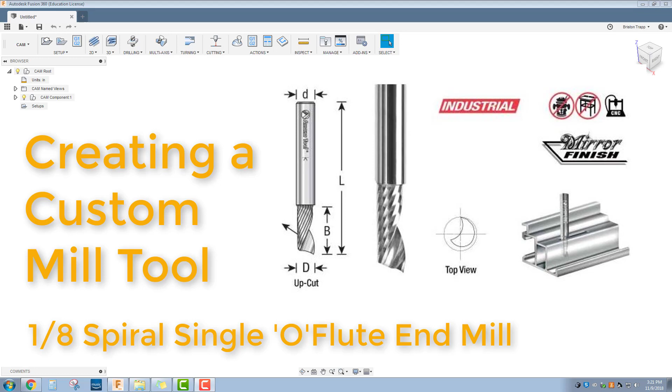Hey everybody, in this tutorial I'm going to show you how to create your own milling tool for the CNC router. We will be using a spiral O flute from toolstoday.com.

It's an Amana tool. This is primarily going to be used for CNC router cutting aluminum sheet metal and plastic. It has an 1/8 inch diameter, a cut height of 1/4 of an inch, shank diameter 1/8 of an inch, overall length of 1.5 inches, and it's a single flute cutting end mill.

$26 a piece, pretty expensive if you're breaking them every now and then.

So in Fusion 360, you need to make sure you're in the CAM workspace, and we're going to go over here on the right to our tool library.

You should have some sections on the side where you have your tools that are stored within your documents that are currently open, and then also cloud tool libraries, local libraries stored on your computer. You're going to stay away from these since you use different laptops. There's also tools from vendors. So if Tools Today or Amana had their own tool library in Fusion, we could select from here, but we have to create from scratch.

There's also these sample tools, but we're just going to start completely from scratch.

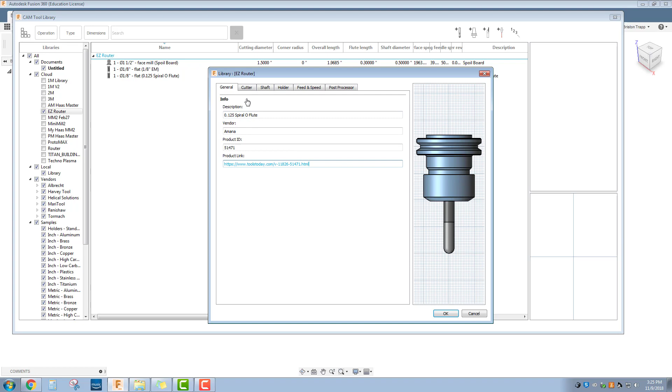On the cutter tab, this is not a ball end mill, it is a flat end mill. It has one flute. It does spin in clockwise spindle rotation, so we'll leave that checked. It's in inches. The material is made out of carbide. It does not have through tool coolant.

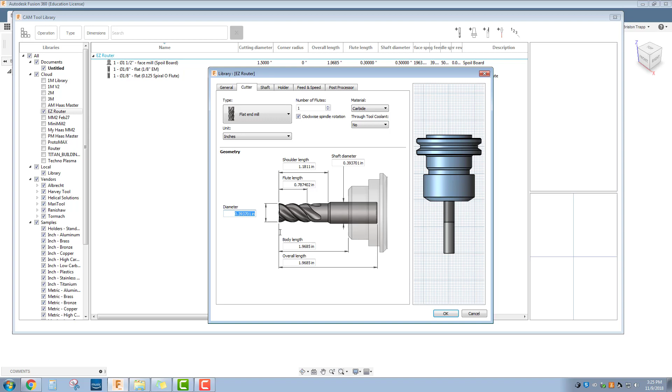The diameter is 0.125, 1/8 of an inch. The flute length is 1/4 of an inch.

The shoulder length typically doesn't matter on this. We're going to leave that at 0.375. We don't even really have a shoulder on this tool. The shaft diameter is 0.125, the same as the cutting diameter. The body length is typically going to be the amount of tool sticking out of the tool holder or collet.

Most likely when we're cutting parts on the CNC router, the EZ Router, or the Patriot, we're not going to have to worry about tool holder collisions because we're cutting fairly simple flat 2D parts. So typically the only value that really matters here is this diameter of 0.125. The second most important one would be the flute length, because we cannot cut anything deeper than the length of our flutes.

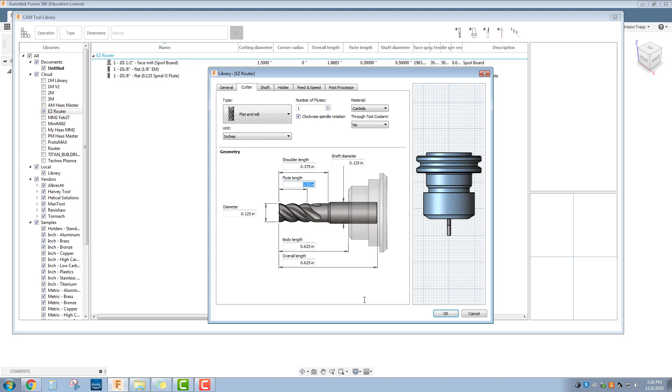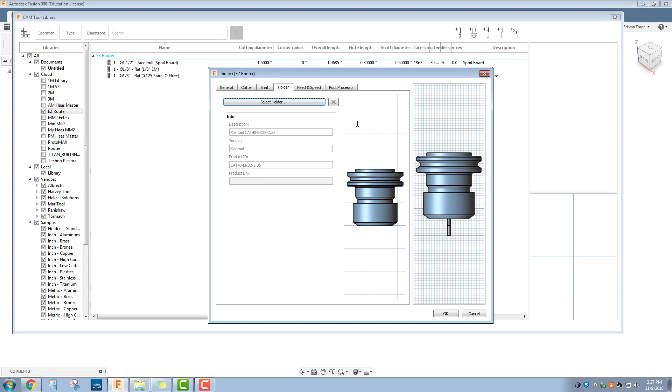Shaft, nothing to worry about there because it's a pretty straightforward, simple shaft on that tool. As far as the tool holder, we really don't even need it. This is a larger tool holder for like a Haas mill. We'll be using an ER25 collet, I believe, but typically, like I said, we're not going to be doing any crazy complex milling where we need to worry about our tool holder colliding with our part. So we're just going to actually go ahead and delete that tool holder. We don't need it, it's just not necessary.

The feeds and speeds tab. Typically we're going to run this tool at 18,000 RPM for the spindle speed. The ramp spindle speed will also be 18,000. This changes depending on your cutting operation and your material, but it's just kind of a good ballpark RPM for this small diameter tool spinning at a pretty high RPM.

Cutting feed rate, we're going to set this at 20. This is a little bit on the conservative side, but it also depends on your material, how deep you're cutting, and whether you have mist coolant and so on. So it's a good ballpark, but we can definitely cut faster, and maybe we might cut slower, but 20 would be a good starting point for a lot of operations.

We're going to leave our lead in feed rate at 20 and also our lead out at 20. Ramp is going to be 6.66 - that's fine, let's make that 10, let's make it a round even number. Typically we're not even going to be ramping this tool, just plunges straight down.

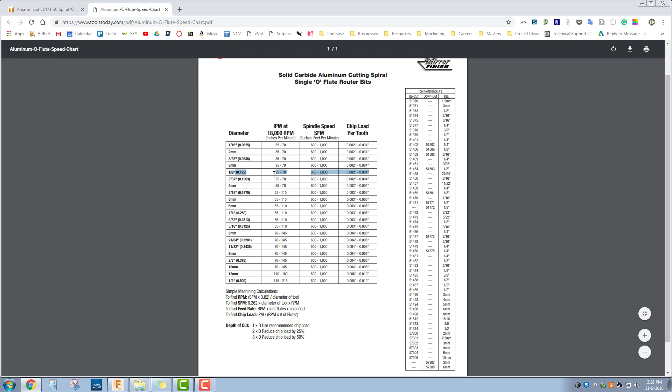Sometimes you'll get these calculated values, feed per tooth, and that's just kind of a good baseline that will allow you to determine if your cutter is doing its job, making a chip. This is a number that usually the factory or company would recommend. So if I go into this tool information from the manufacturer in PDF files, right here I can get a feed and speed chart that will basically say that our 1/8 inch tool, cutting at 18,000 RPM, approximately be 35 to 70 inches per minute, with a spindle speed surface feet per minute of 600 to 1,000, and then the chip load per tooth of 0.002 to 0.004.

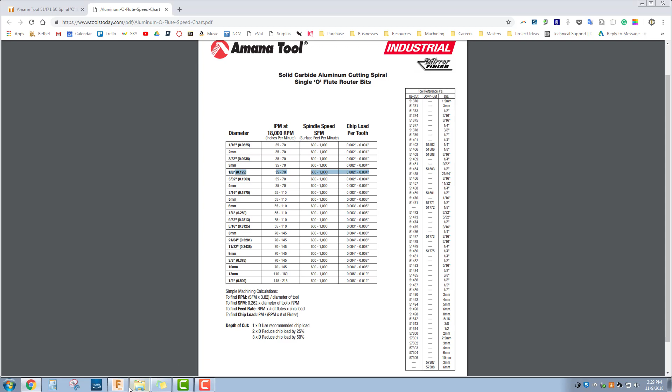Vertical feed rates, plunging, we can plunge at 10. Post processor, this will be tool number 1. Comments, we can call this 0.125 - or probably best, since we already have that 0.125 in the tool description, comments would be... aluminum and plastic. It will actually be on mist coolant most of the time, but that doesn't really matter because our mist coolant is not connected into our control. It's a manual switch for that.

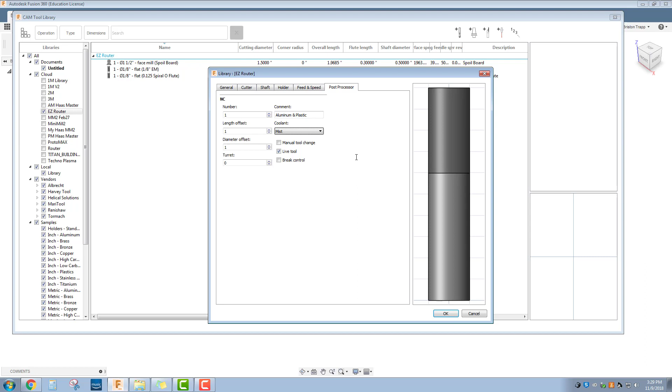I'm going to click OK. And we now have our 1/8 inch spiral O flute. We can go and edit that, we can change any of these if we need. So this is the tool that we'll be using to router the polycarbonate or Lexan window for your coin vault.